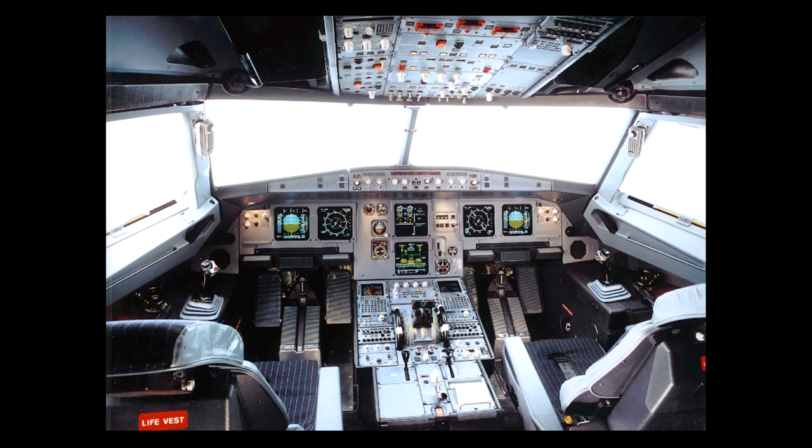When entering the cockpit, the first item to check is the battery voltages. You look at the battery voltage displays on the electric panel. Both are below the minimum required 25 volts, so you will have to recharge the batteries from external power. Switch battery 1 on.

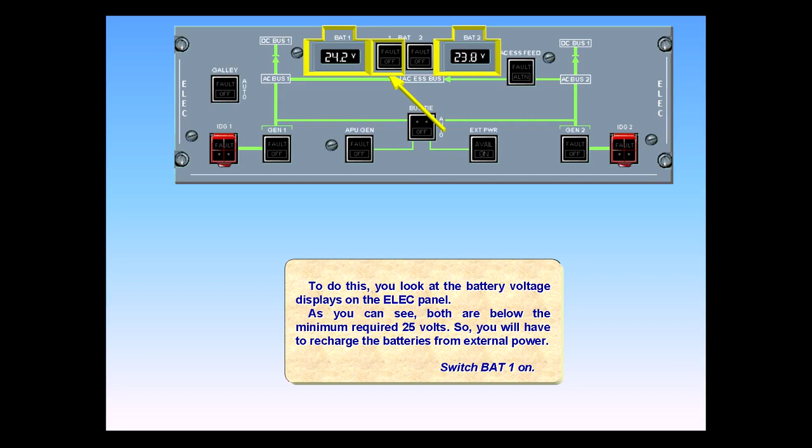Note the off light has illuminated on the battery 2 push-button switch because now the aircraft has electrical power to provide that indication. Switch battery 2 on.

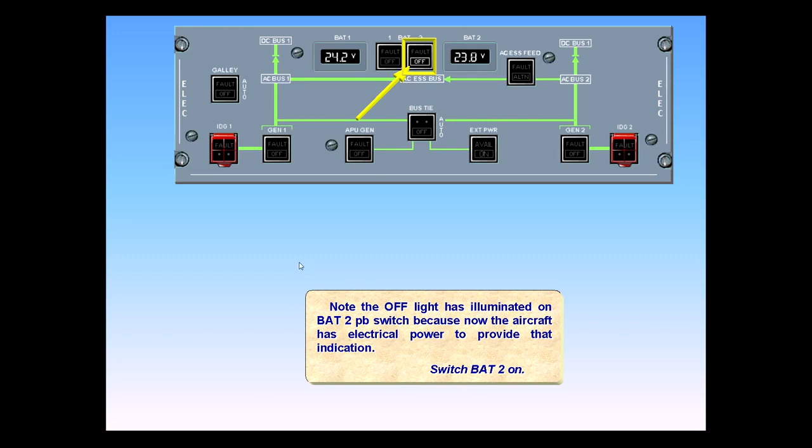The ground cart is now connected. The green avail light has appeared, which means external power is plugged in, its voltage and frequency are normal, and it is ready for use. Switch the external power on. When the blue on light is illuminated, the ground cart is supplying the aircraft.

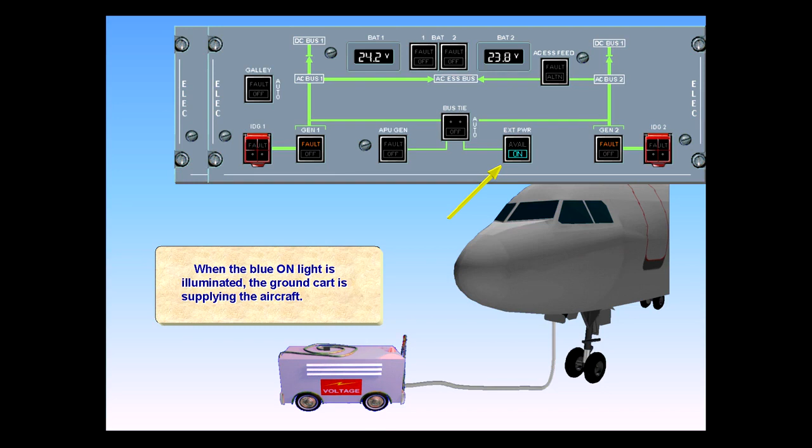The ECAM electric page has been called for you. Note that voltage and frequency are within normal parameters, since they are shown in green on the ECAM page. By following the green lines on the ECAM page, you can see that the external power is supplying all the electrical system.

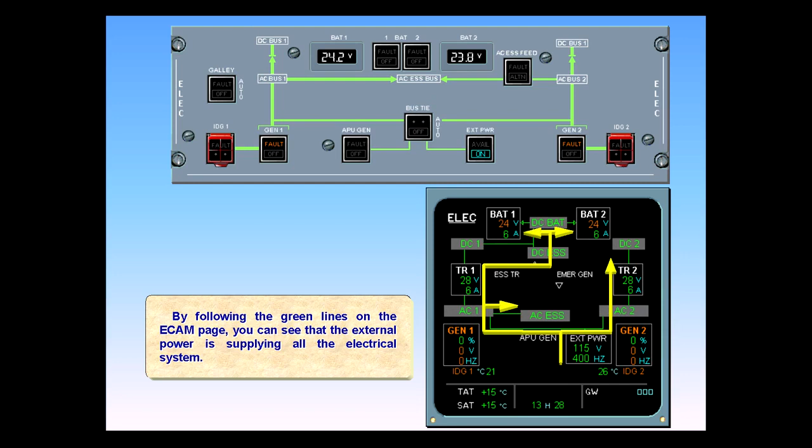Because the engines are not running, the indications of the associated generators are in amber, and fault is illuminated in amber on the generator push-button switch.

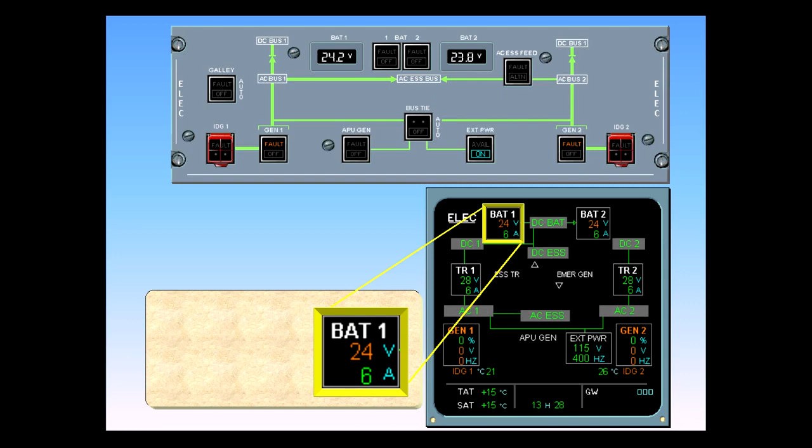On the ECAM page, the battery voltage and current are shown. Because the voltage is not yet normal, the value stays in amber. You can also see the green arrow, which indicates that the DC battery bus is charging battery 1.

Both batteries are now charging from the DC battery bus. During this time, you can continue with your cockpit preparation. The average charging cycle is approximately 20 minutes.

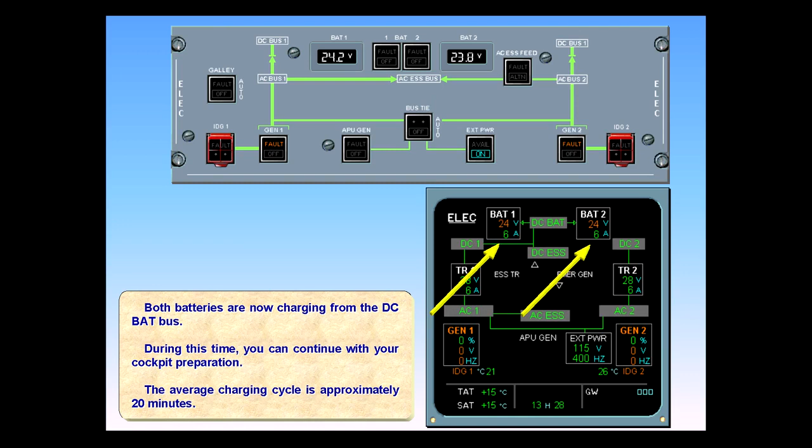The battery charging cycle is now complete. The green lines connecting the batteries to the DC battery bus have disappeared, indicating the batteries have disconnected.

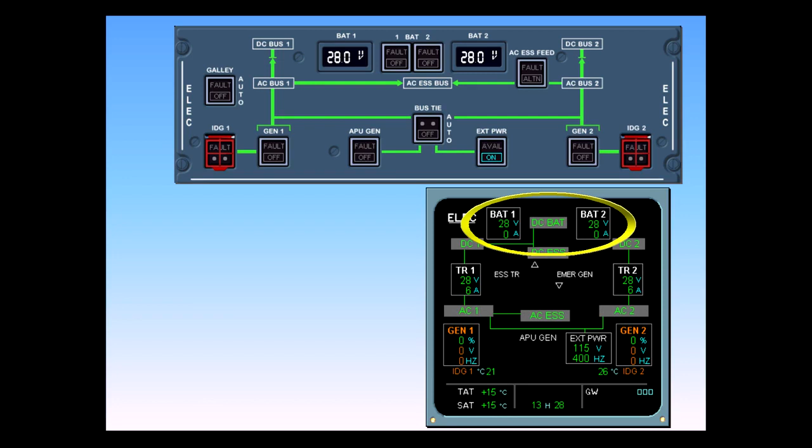The APU has been started, and it is time to disconnect external power. You can see on the ECAM page that the APU generator parameters are now displayed.

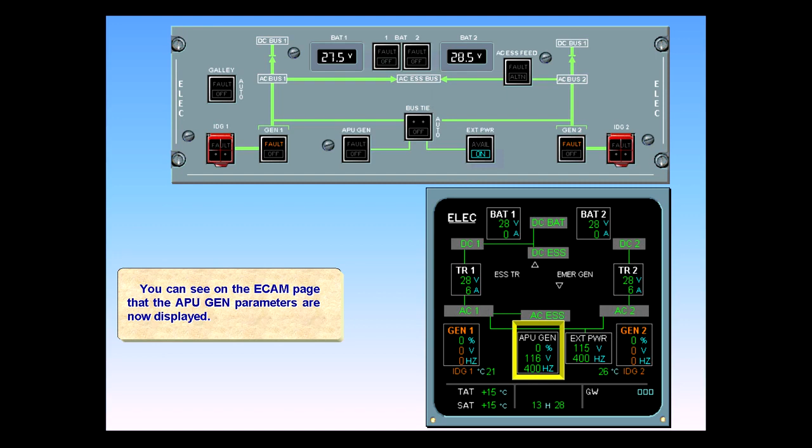Notice that the APU generator has not automatically taken over supplying the electrical system from the external power. This is because external power has priority over the APU unless external power is deselected.

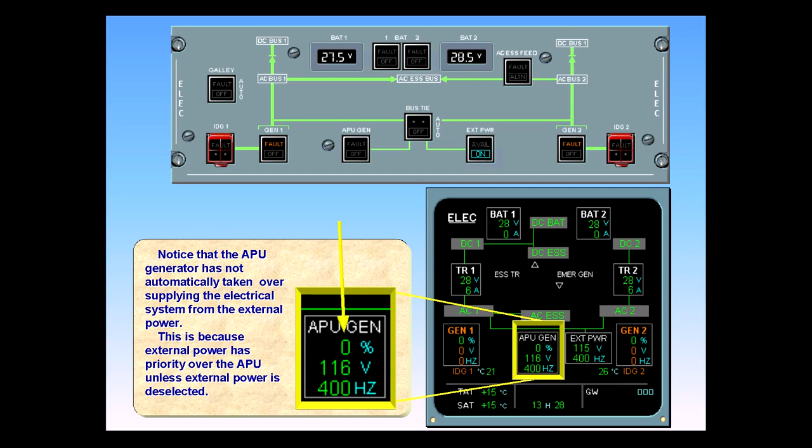To select the APU generator, deselect external power. Switch the external power off.

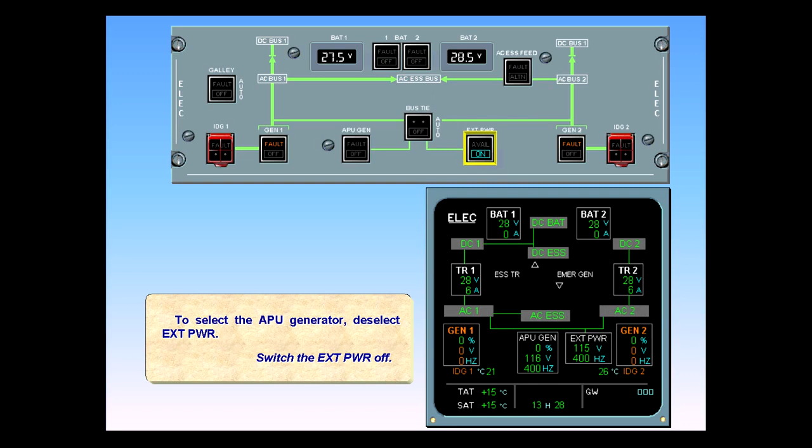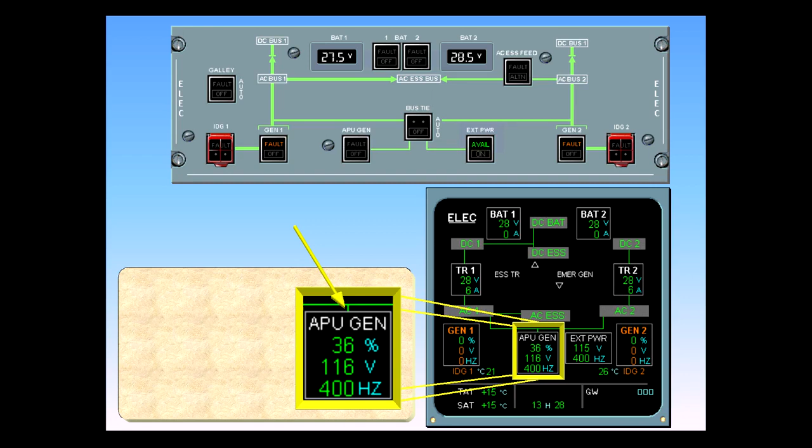A green line has appeared connecting the APU box to the system. This means that the APU generator is now supplying the aircraft. You can see that the load is 36%.

The external power is still available. However, we no longer need it, so it can be unplugged by the ground personnel. The avail light is extinguished, and the external power indications on the ECAM have disappeared. The external power source is disconnected.

The electrical system is designed so that each engine generator will automatically come online and power its respective bus. We will start engine 2 first. Note, it is UAL policy to start number 1 engine first. In this sequence, number 2 is started first simply as a matter of convenience.

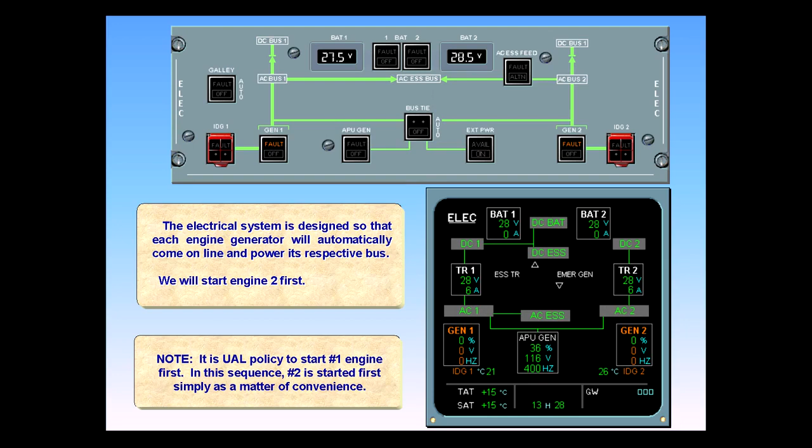The engine is running. Notice the generator automatically supplies the right side of the electrical system, leaving the APU to power the left side. Notice also that the fault light on the generator 2 switch has disappeared.

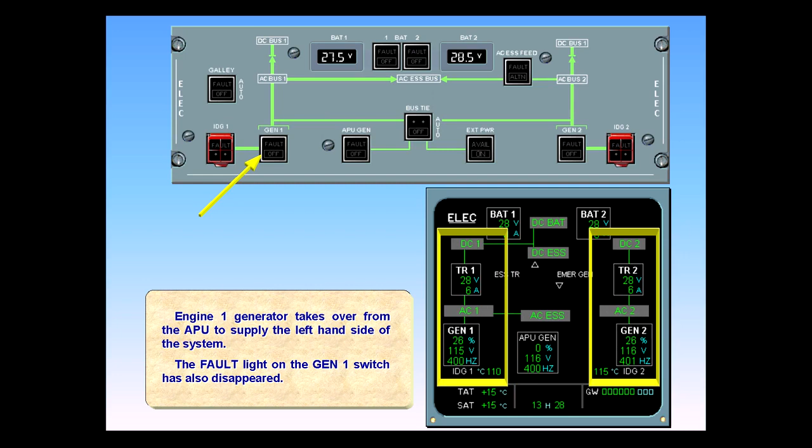Once engine 1 has started, engine 1 generator takes over from the APU to supply the left-hand side of the system. The fault light on the generator 1 switch has also disappeared. The APU is no longer connected to the system, and the APU generator is now showing 0% load.

Once both engines are running, the APU can be switched off. Switch off the APU. The electrical system is now in the normal configuration for taxi, takeoff, and landing. In a normal flight, no further change occurs to the electrical configuration until the APU start on taxiing in.

Now that the aircraft has landed, we will start the APU for you. The APU is now available and is standing by to take over from the engine-driven generators when the engines are shut down.

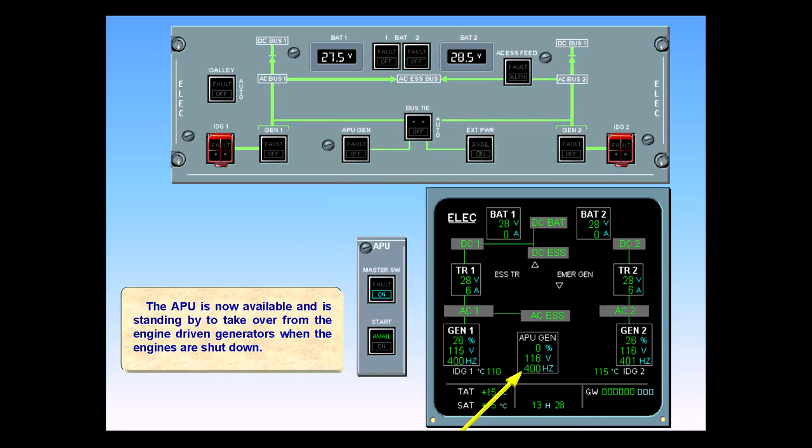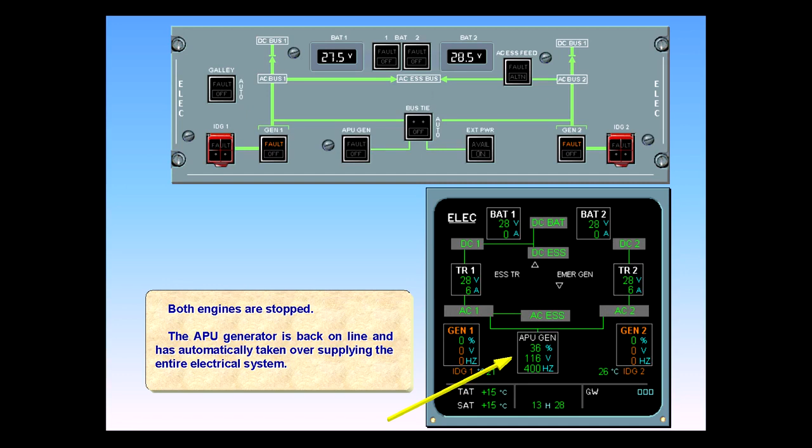Both engines are stopped. The APU generator is back online and has automatically taken over, supplying the entire electrical system. For training purposes, we will assume that the aircraft is to be completely shut down, so you have to request an external power source.

The avail light on the panel and the external power indications on the ECAM have appeared, indicating that the external power source is plugged in and available.

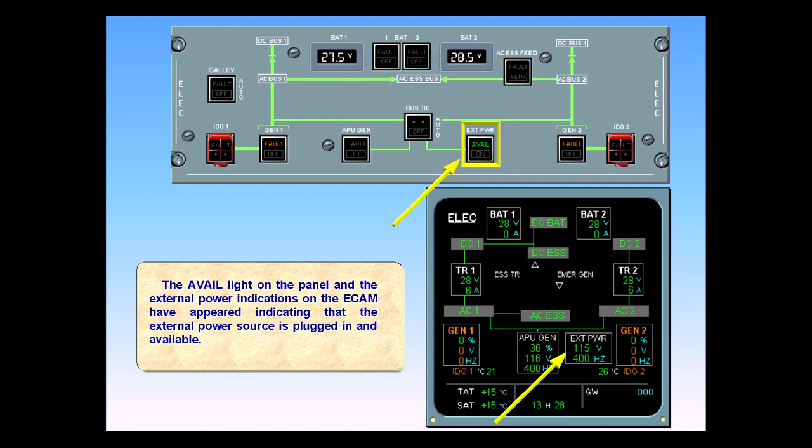The on light is illuminated in the external power switch, and the green lines to AC bus 1 and 2 indicate that external power has taken over from the APU. We can now shut down the APU.

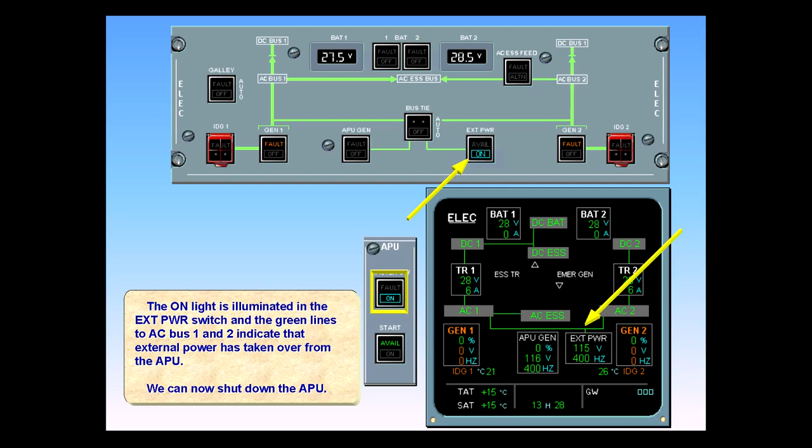The external power can now be switched off. Switch the external power off. When all the main power sources are disconnected, the CRT screens become blank. To shut down the entire electrical system, we must switch off the batteries.

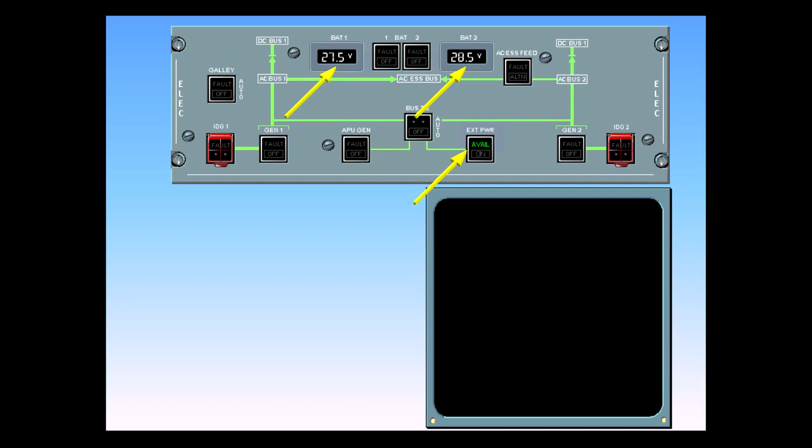Switch battery 1 off. Now switch off battery 2. All lights on the overhead panel have disappeared except the avail light, which is receiving power from the external cart. The battery voltage indications are LCDs and are wired directly to the batteries so that they are always displayed.